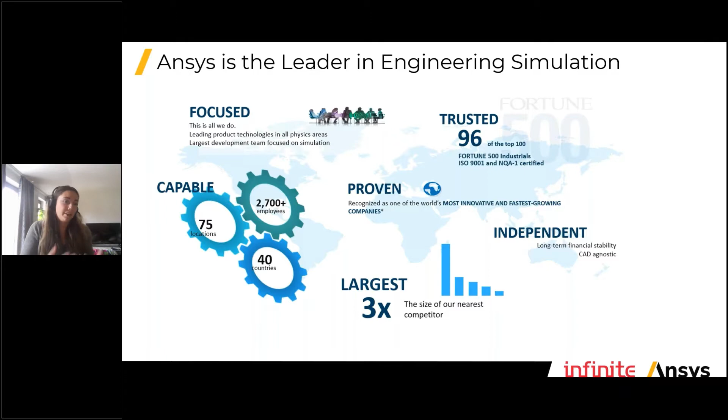So why Ansys? Ansys is definitely the leader in engineering simulation. Ansys is now over 50 years in the business. And I think the main benefit from working with Ansys is that Ansys is only focused on simulation. So everything that Ansys does, everything that Ansys develops or integrates within their system is based on simulation. And as you know, simulation is key right now. You can benefit from it in every stage of your workflow, which is why it's very nice that Ansys is the leader in simulation.

As you can see here, it gives you already a very broad overview of all the major physics where Ansys is active. It's not only limited towards structures or fluids, from which you may know simulation, but it has been expanding towards electromagnetics and even optical.

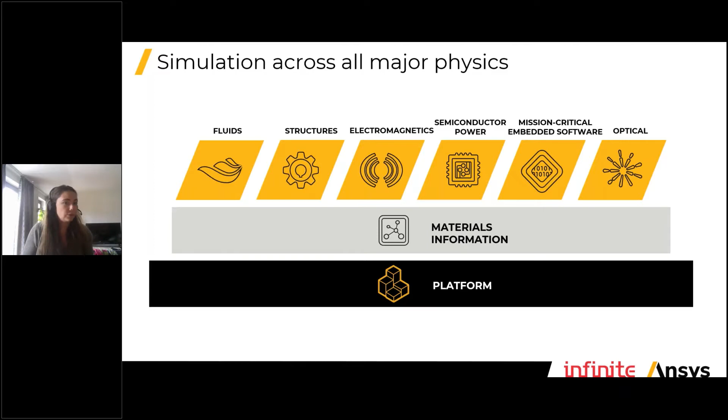What is also important to know for Ansys is that we have a platform-based workflow where we have Ansys Workbench. It's a centralized platform where you can actually link every kind of simulation and use the results of maybe your structure simulation within your fluid simulation, which makes that every single tool of Ansys can be combined and used to optimize your simulation.

So let's go further to the startup program. Why should you choose Ansys? Well, Ansys is a very renowned software package, and we do not set up a different kind of tool for our startups than for our commercial clients, of course not. So what you can benefit from during your startup years is that you are able to use the full license of Ansys that every other big company uses as well.

And why would you implement simulation? Well, as I said before, you can use it in every stage of your workflow, which will eventually help you reduce your cost. It will help you better develop your products, make very wise decisions, and it will also help you limit your prototype manufacturing to only those specific designs that you know will work.

So within that startup program, of course, we will help you find the right workflow and find the right tools for you. But there's also an opportunity to gain brand recognition. We will engage with you to also broaden yourself on a marketing level, where we will provide visibility on the Ansys website and on the Infinite website, or Infinite and Ansys social media posts, as well as you will do the same, and we will connect on that level as well.

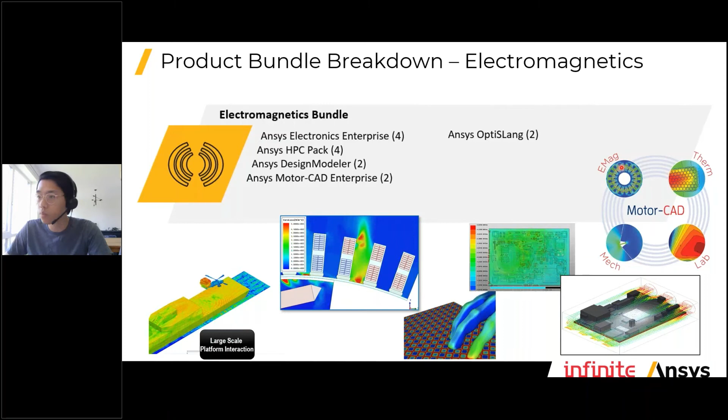As you can see, each bundle contains a lot of different products. You do not need to use all of them as a startup. Usually you will start with one product - for instance, maybe mechanical only. But after a while, as you explore and change your design course, which happens quite frequently as a startup, you can switch into other physics and other design tools immediately, with no extra cost.

Keep in mind that the Ansys startup program is really there to help you succeed. You only need to pay a very tiny amount of cost to access the flagship products, so even if you're just using one product, it's still going to be way cheaper than the actual commercial price. So don't think that since you're not using many products, you don't want to go for startup - even if you just use one, it's going to benefit you a lot.

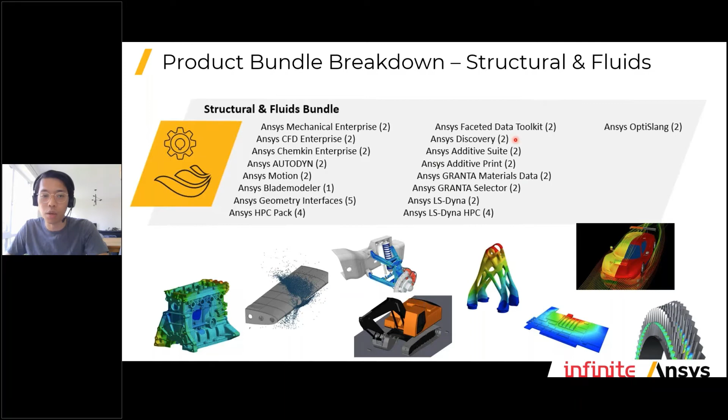And it's not just about the capabilities, what kind of analysis you can do, but also about HPC and optimization. So what is that? HPC is short for high performance computing, which gives you the capability for enhanced productivity for your engineers.

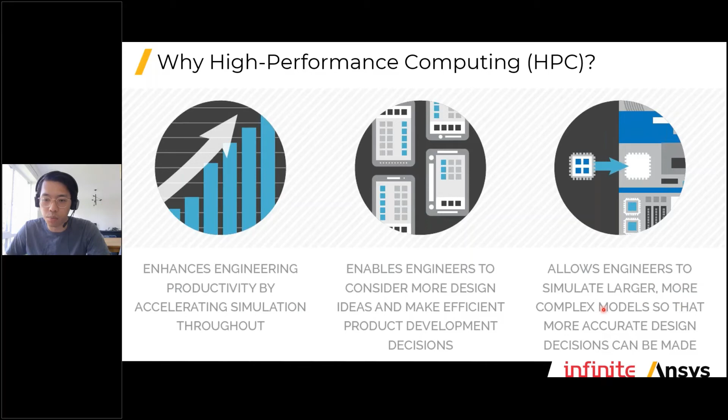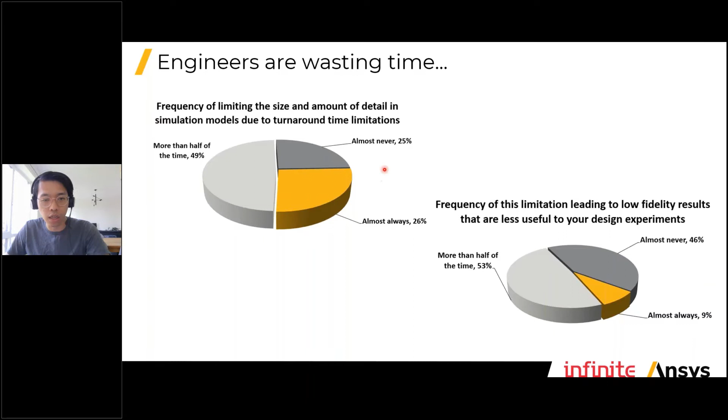It gives you the option to enable more designs, consider more designs, and see which one is best. It also gives you the possibility to calculate a larger simulation, get higher fidelity results, and get more accurate engineering insight in your design phase. This is actually a major concern, because a lot of simulation engineers find out that hardware or HPC limitation is one of the major limitations for them to conduct a large amount of analysis or get high fidelity results.

This is why Ansys invests so much in increasing scalability and productivity of simulation when scaled up into a large number of cores, running calculations in parallel, and speeding up in an exponential curve, which brings your simulation time down exponentially.

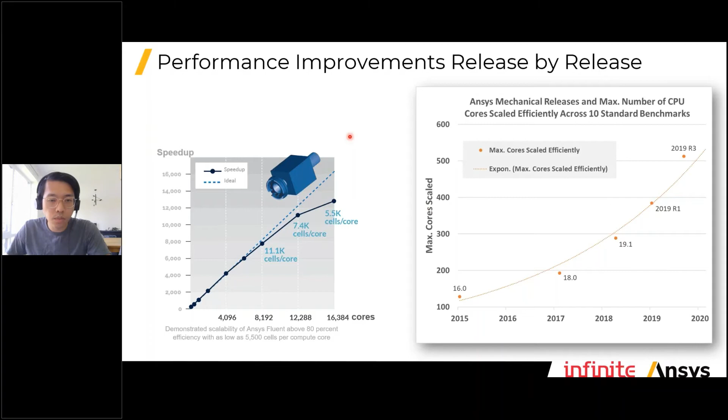This is the HPC license, which is included in all of the Ansys startup bundles. The Ansys HPC license not only enables you to run a larger model, but also enables you to run a larger number of parameters simultaneously. That means you can explore 5 different variations at the same time, or even 20 different variations at the same time, just to see which works better - instead of running them one by one, now you're running them all together, which speeds things up dramatically.

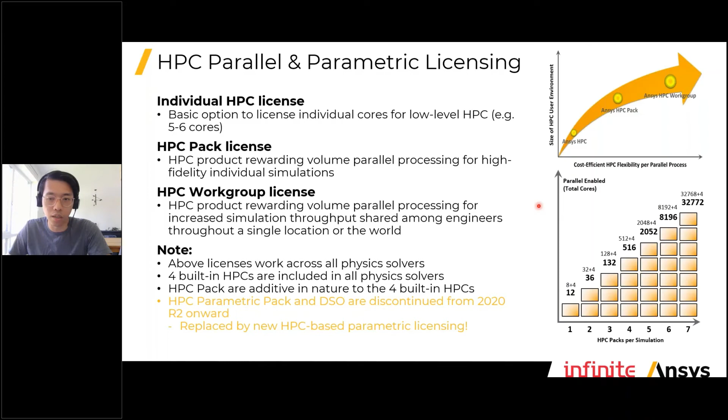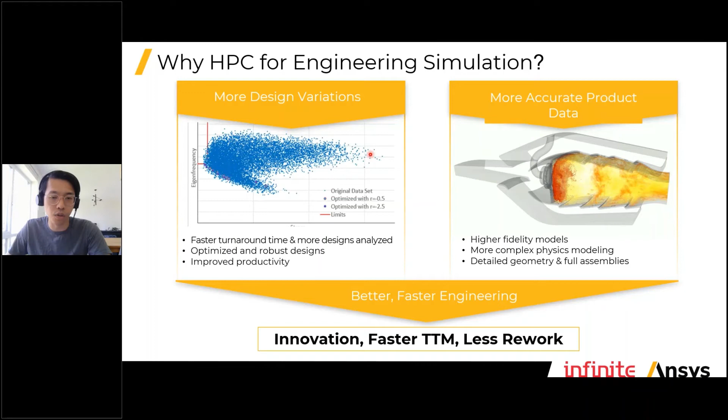For more design variations, you'll notice that in the structural and fluid bundle, and also in the electromagnetics bundle, Ansys OptiSLang is part of the starter bundle for both. OptiSLang is actually a very advanced tool to help you get optimized results in a quick and efficient way. It helps you run through hundreds of parameters very efficiently, optimize the model in a short amount of time, and gives you robust design optimization with quantified uncertainty, achieving design for Six Sigma quality.

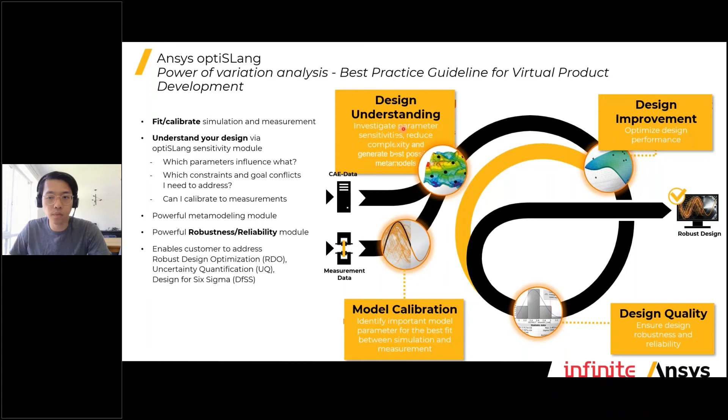Now, as a startup, you won't always have your own hardware available for running hundreds of cores to leverage the highest capability of the Ansys Startup Bundle. In that case, you can combine it with Ansys Cloud. Ansys Cloud gives you access to all the HPC hardware resources on the cloud as easily as possible, fully integrated into the software interface. With just a few clicks, you send the job to the cloud, get the result back, and do pre- or post-processing either on the cloud or on your own desktop. Ansys Cloud is hosted by Microsoft Azure, giving you access to up to 700 cores or more, depending on the size of your model and the application.

Once you have these fancy capabilities, the major question is, how are we going to start? This is why we're here to help. As Infinite, we help you get the software, establish your first workflow, and give you proper training to teach you how to get started with your first simulation. If you face any technical issues or engineering challenges, we are here to support you—just contact us through our support hotline or support email. In some cases, we can even provide consultation, using our decades of experience in simulation fields to give you the best practice in your product design workflow.

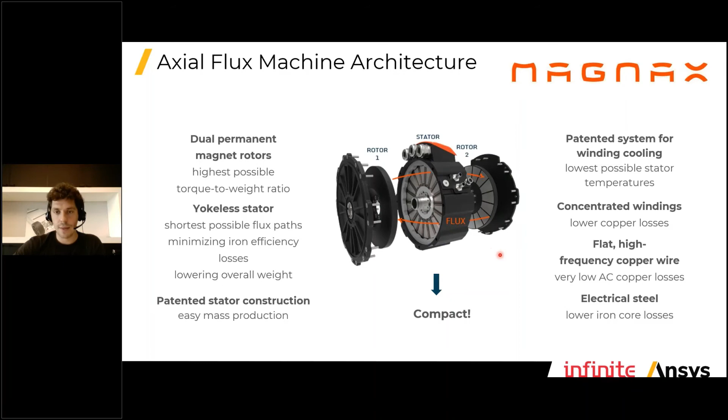To point out where we excel: we have a very high power density due to the way the motor is built up. We can omit the yoke, which reduces the weight quite effectively, and we're also more efficient than traditional motors due to lower iron losses. It's also very suited for automated assembly.

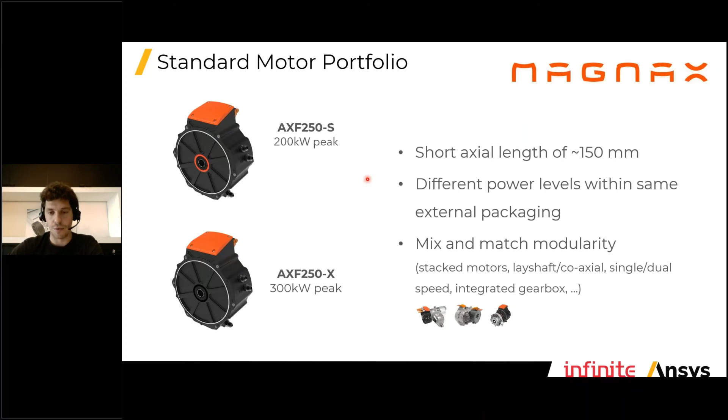Then I wanted to show the motor portfolio we're currently working on. We're making two initial motor types, a 200 kilowatt variant and a 300 kilowatt variant, in the same package. You can mix and match them together to have a modular system, combine them with gearboxes or inverters as you like.

Now I'm going to go into how we actually use the startup program to make our design better. The first thing I want to say is that the Ansys Startup program gives you access to a lot of Ansys products, which gives you the possibility to explore and evaluate new ideas very quickly in different physical domains.

I'm mainly going to talk about electronics, so Ansys Maxwell that we use, because I'm an R&D engineer in electromagnetics. This is really my kind of thing, and I know a bit less about the mechanical and Fluent simulations we're also doing.

So what you can do is 2D electromagnetic modeling and 3D electromagnetic modeling. You can use 2D if you want very quick simulations, where accuracy is a bit less important for the moment because you want to quickly see what different design variations would do. Or you can switch to 3D modeling, which gives you very accurate results.

And then you can extract all the data you actually need from electric motors, such as performance characteristics, torque current graphs, or torque speed profiles.

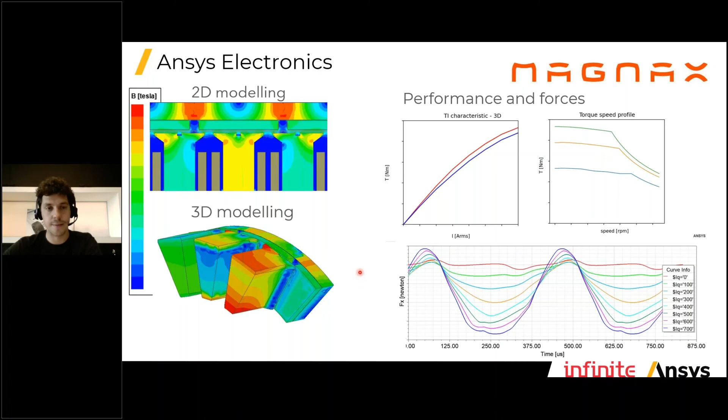Or you can plot the flux densities in your motor, etc. Then I wanted to highlight a very useful tool within Ansys Maxwell called Optimetrics, which allows you to sweep over a lot of different parameters. You can parameterize your entire model, and then with Optimetrics sweep over different values for that parameter and compute the model over and over again.

We use this to sweep over different ID and IQ values, that's D axis current and Q axis current. Those of you into electric motors will know what that is. By simulating over ID and IQ, the currents, you can extract the flux values and torque values. So you end up with flux tables and torque tables, which we then use in Python. You can easily extract them in a CSV file or a text file.

We use that in Python to set up different set points for our further simulations, determining the optimal current set point for a certain torque and a certain speed. Then you can create a new Excel file, which you use again in Optimetrics to sweep over all the operating points you want to see simulated.

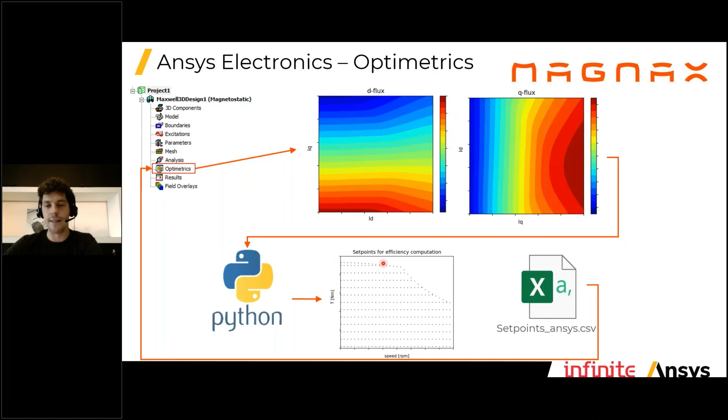Seeing this loss distribution allows you to see which loss is the highest. If you're looking at very high speeds and want to optimize your design, you could see that one type of loss is higher at that point and then see how you can reduce these losses to increase efficiency. The efficiency map itself can then also be used further in system simulations.

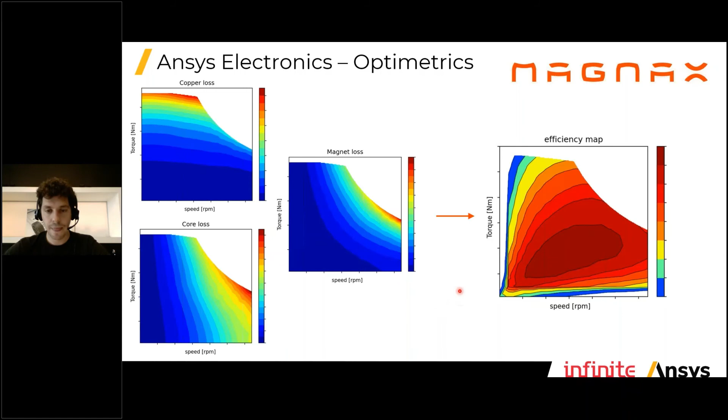You can then see what the effect of your control on the motor is. So you have induced current ripples fed into your motor to see how much additional losses or how much additional torque ripple you would have.

The other way around can also be done. You can change things in your model here, change geometries, change materials, and see what the effect is on your controller behavior itself, whether it's still stable or not. It also allows you to investigate different control strategies like space vector modulation or square wave modulation.

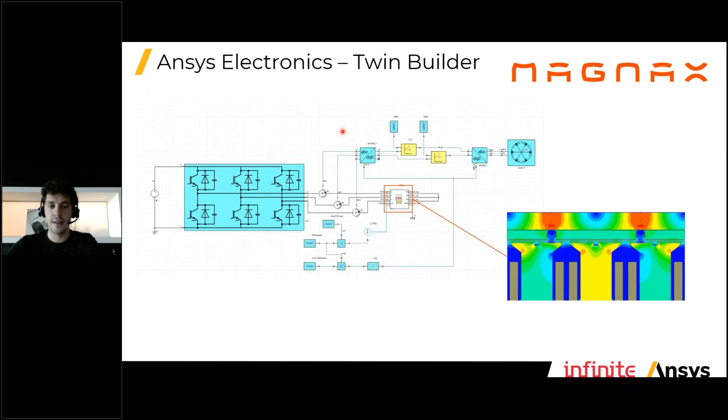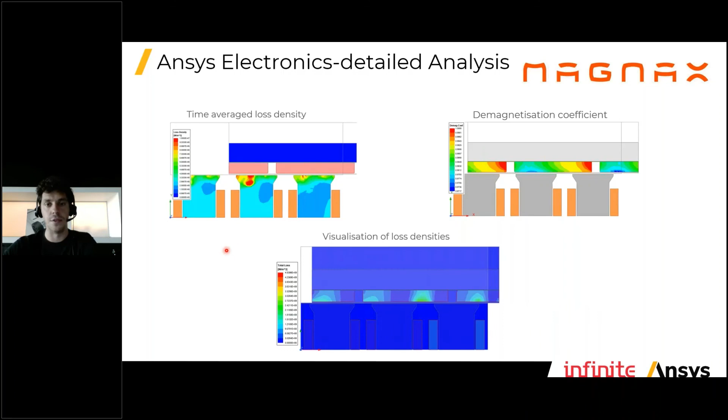And then I still wanted to highlight that Ansys Mechanical and Ansys Fluent are also used inside Magnax. That's less my thing since I'm mainly an electromagnetic design engineer, but for instance, we use Mechanical to see deformations and stresses in different components, or to see the modal shapes and natural frequencies of components that are connected together.

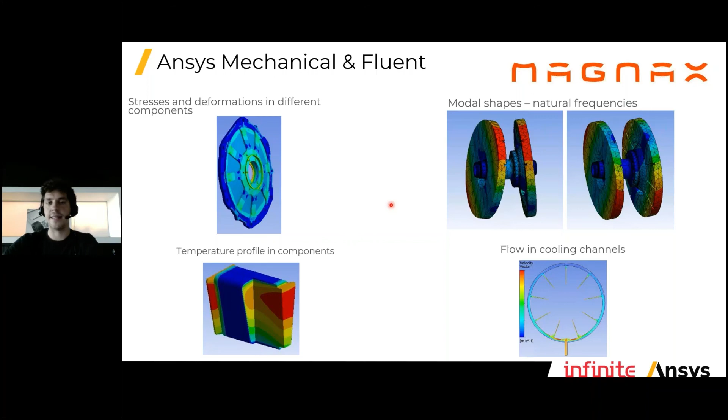We can estimate or simulate temperatures in different components, or use Fluent to see how your coolant is flowing in the channels and how it distributes across your motor. But I can't say that much in detail about this because I'm less involved in these simulations.

Then I wanted to recap what we actually do with the start-up program and how it helped us. It really helps that you can model components and systems over different physical domains. I mainly talked about electromagnetics, but as you saw in the last slide, we also use Fluent and the CFD solvers to really characterize the entire system.

And you also have access to HPC licenses, which really drastically speeds up simulation time. So you want to simulate larger models, or you can run a lot of simulations in parallel if you want to, say, change this geometry from 1 to 10, and change that geometry from 1 to 10, sweeping over all the variations, and then evaluate the results afterwards.

Benefit of simulation is, of course, that you get insight into what happens inside the product. Even for novice users, if you're not super experienced in simulation, comparative simulations can really help make decisions without needing the highest accuracy from the beginning. So this is how we use the start-up program and how it helped us grow a lot over the past years.

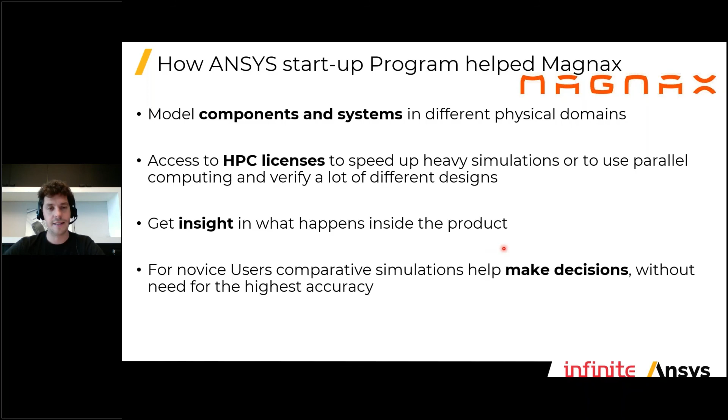Yeah, so Sarah, I think it's up to you again. Thanks, Dan.

What's next? As you saw, Magnax really benefited from the startup program, introducing it very early in the growth of their company. They used both the structural and fluids bundle and the electromagnetics bundle, but that's not everything that's possible. You don't have to fix on only one bundle, we can provide everything that you need.